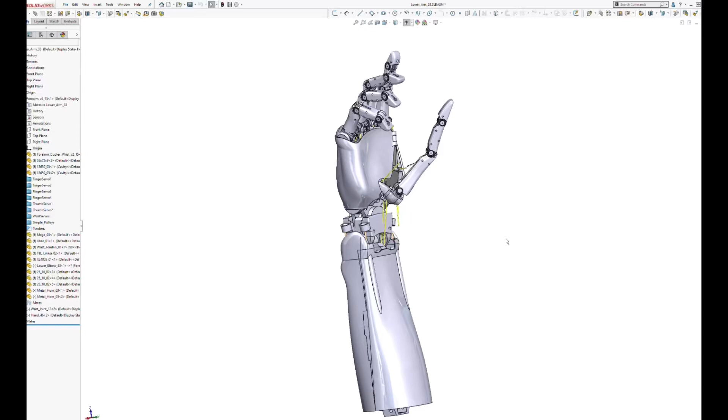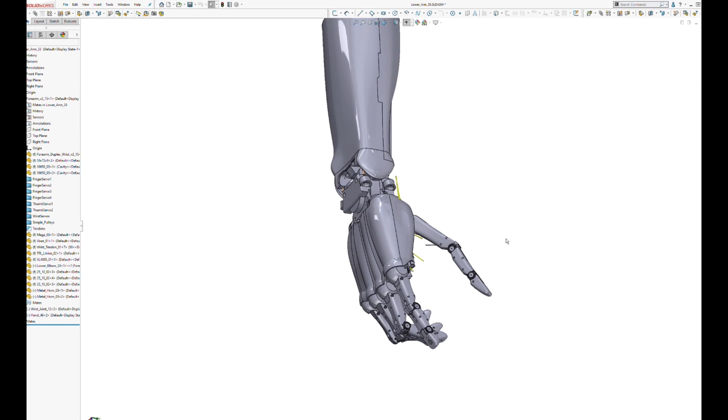Very nearly finished this first design phase for the V2, version 2 of the Dex hand, for dexterous hand. It's got an improved layout. There's 10 servos now in the palm section. Have a quick look at it if we make this transparent.

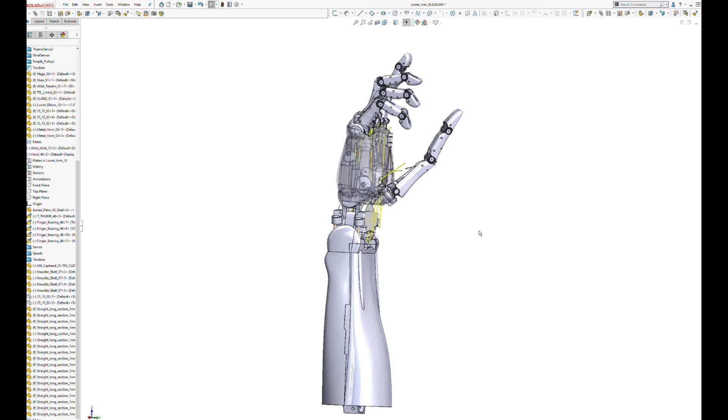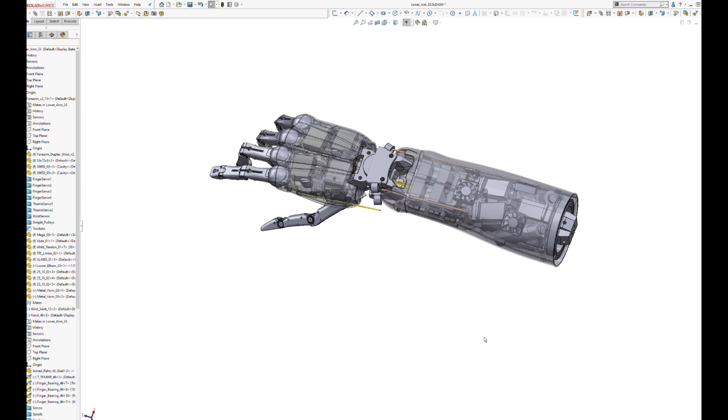And I've upgraded the wrist motors in the forearm area to standard size servos. So it's a lot more, I guess, powerful, but certainly stronger is what matters. It's also got twin fans in the forearm, because we did burn some out in the V1. And it's a little ugly, but you can also put 2 fans on the back of the hand, and time will tell if that's necessary for all functions.

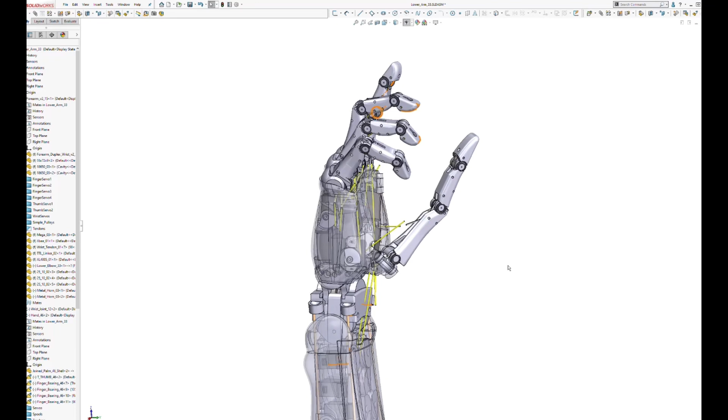Inside of the fingers is a lot smoother to help with simulation. Thumb might need a bit more work still. Not clear how to do that in computers. So that I'm going to do in physical prototyping, as in I'm going to build it and I'm going to see how the thumb performs.

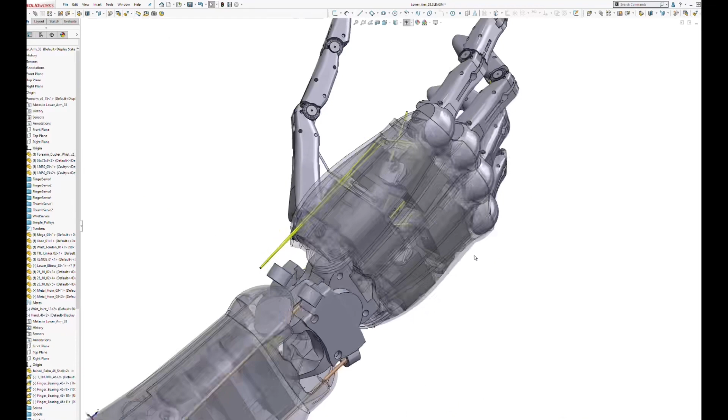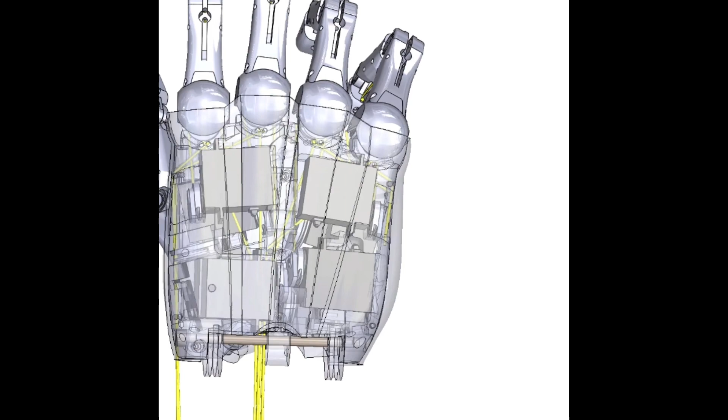So let's just take a closer look at the hand. It's got a concave palm, should help with gripping. Quite a prominent heel on the little finger side, but again to help with gripping. If we take a look inside, the extensor cables have been brought to the outside to make access far easier.

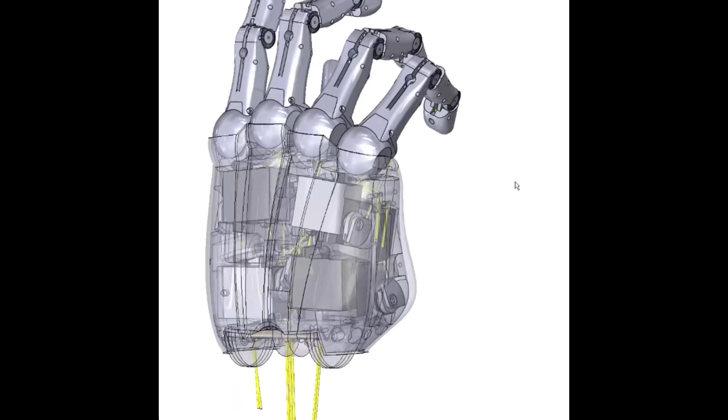At the moment these are still generally done with elastic bands, and they need to be changed far more frequently than any other part of the system. If I can source decent metal springs at a reasonable price that are exactly the right size, I will move over to those. Strangely hard to find. Generally have to buy a kit of hundreds of springs to get the 2 that you want, and I need at least 4 per hand.

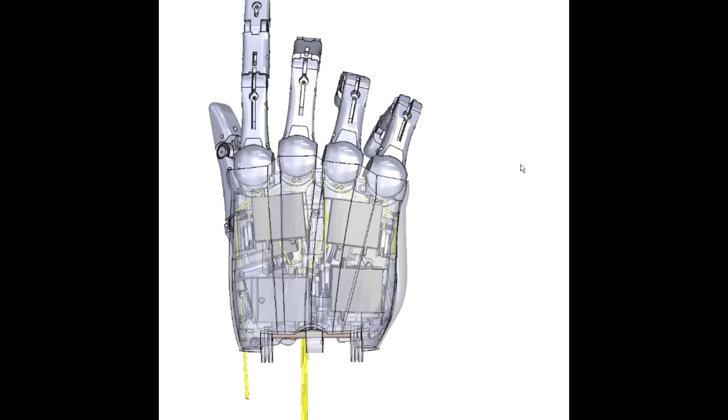Interesting to see if there's enough material to make the wrist joint as strong as it needs to be. And there are still these knuckle shells, which are going to need a mechanism to keep them in the right place, and I think I know what I'm going to do, again using springs, just connected at the back there, but that's a little experimental too.

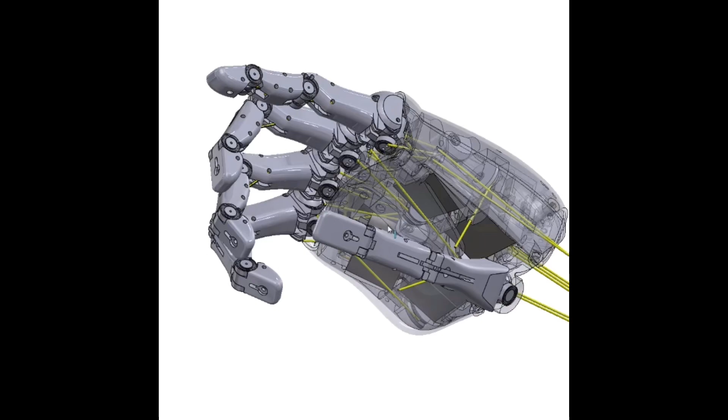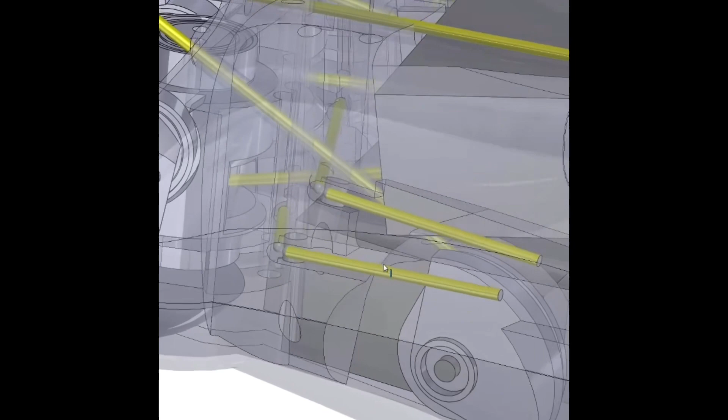Nonetheless, the bulk of the tendons should work almost exactly as the V1. The outer 2 had to go downwards at a considerably steeper angle, but that's just the way it is. And you can see how tightly everything's packed together. Tolerances: try to leave 0.4 for anything which has to move past another component, and 0.1 for the fit.

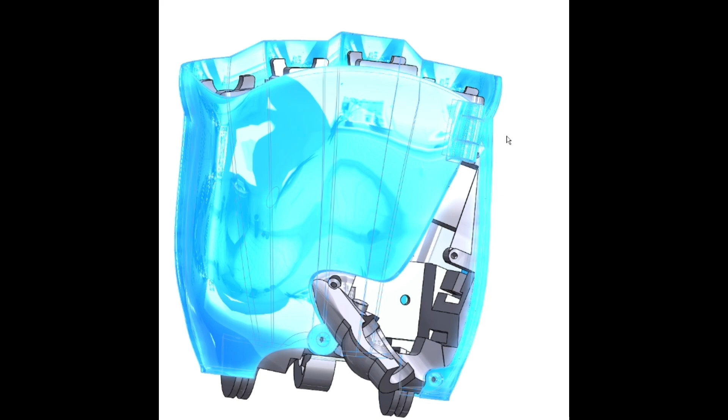So if we open up the palm, which is made of 4 solid bodies, we can hide the outer shell, which allows you to see all of the internal detail. This then gets split apart into its 4 separate pieces, and they can get loaded up onto the printer.

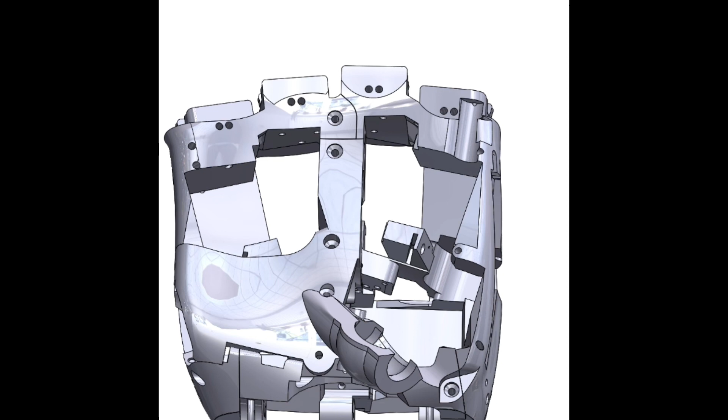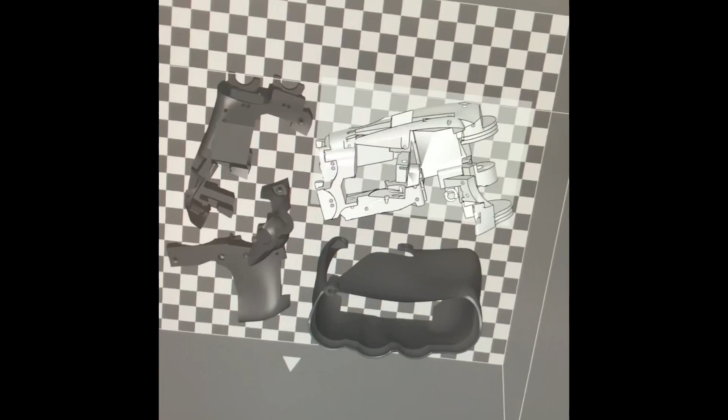These are the parts to print the palm, loaded into a slicer: outer cover, thumb support, little finger, and the thumb side. This is the Up Box slicer, which I'm doing more or less at maximum density, full strength print. Just hit preview and it will slice them up. These have been loaded as 4 separate models, so it'll do 4 sets of slicing.

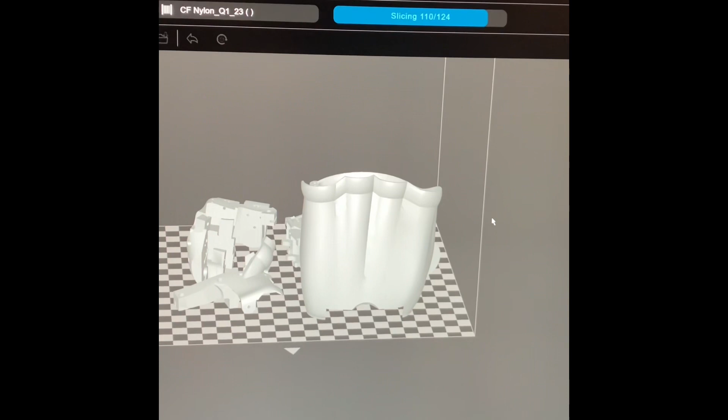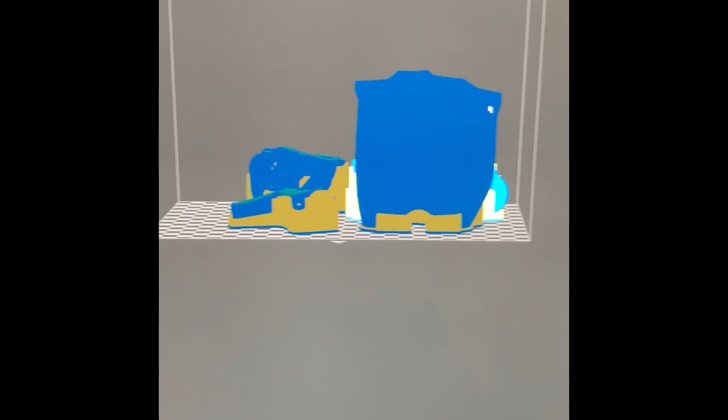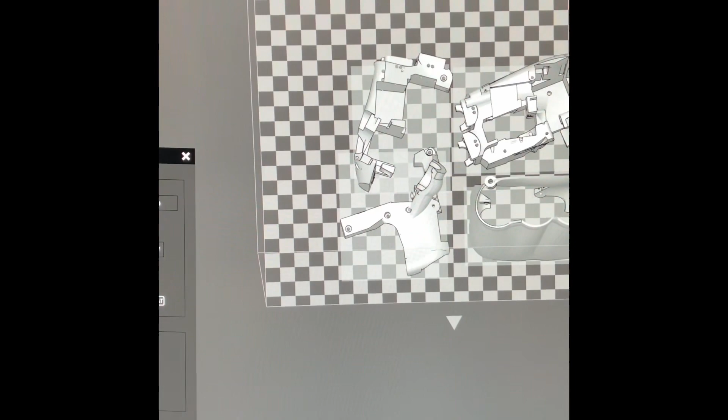It also means you can't pack them quite as closely together because the rafts will interfere. Although I think I'm pretty near to the stage where I can print without rafts, which will save a bit of plastic and a little bit of time. So that's going to take 8 hours and use 213 grams, and that is printing with a 0.4 layer thickness and a 0.6mm nozzle, which is about as fast as you can print on this machine.

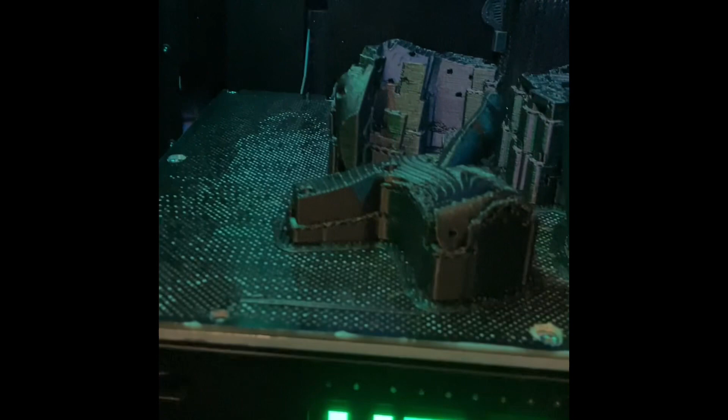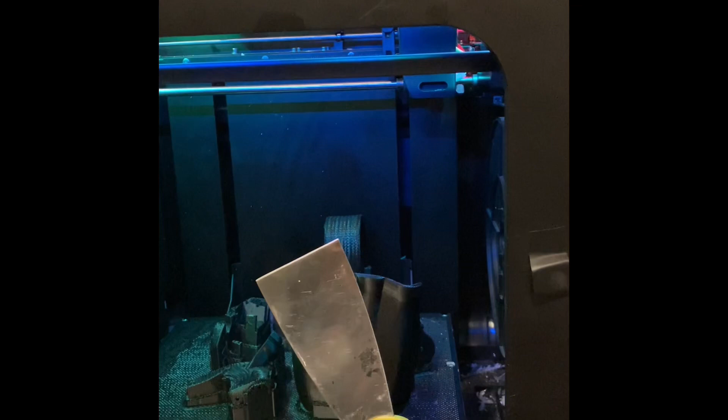Very important, must dry your filament before it goes in, especially with the nylon. Even overnight, it will show a clear difference of printing quality. That lot's come out pretty good. To get them off, you're going to need a spatula or a paint stripper. They should be well bonded, which they are. Platform preheats.

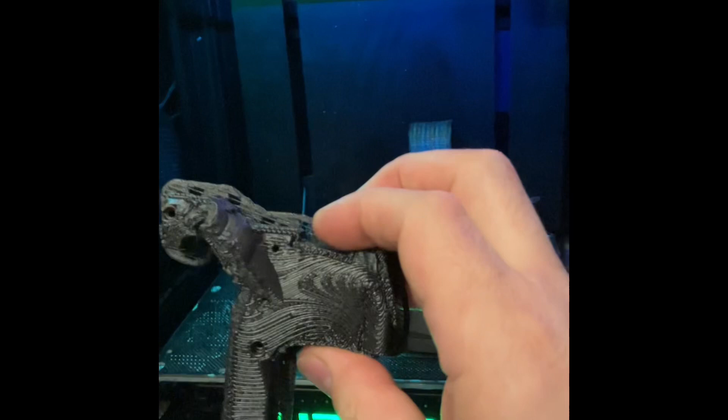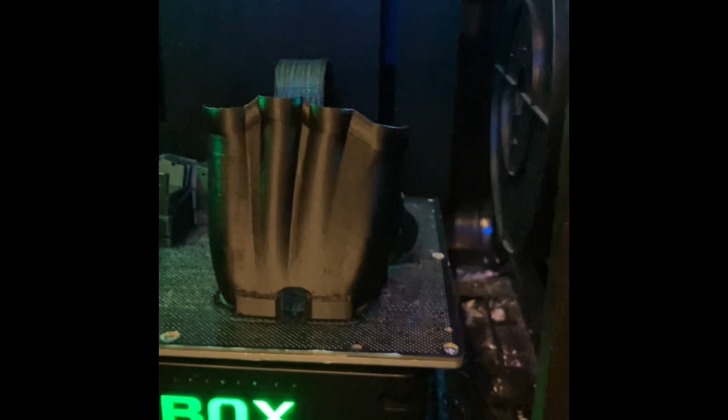65 degrees. Stability is good. Finish is good, not perfect. Good enough. Doesn't really matter on this one. So it could always be done with a finer setting if you really want to get perfect finish on that. This is, I doubt, the final version. Normally use 2 hands for this. See in a moment.

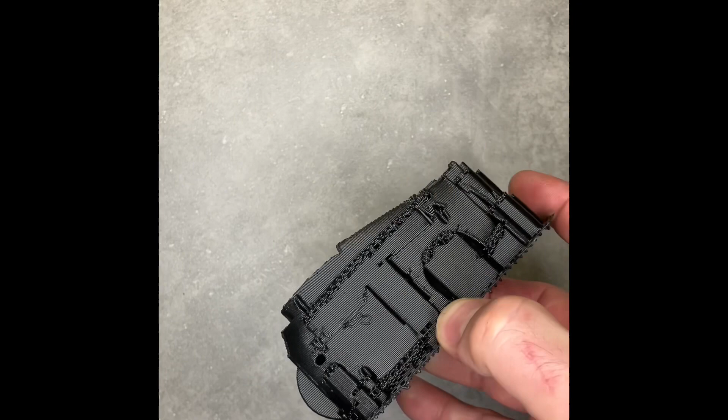The first rule of peeling complex prints, of removing the supports, is always wear a glove. The second rule of peeling complex prints is always wear a glove.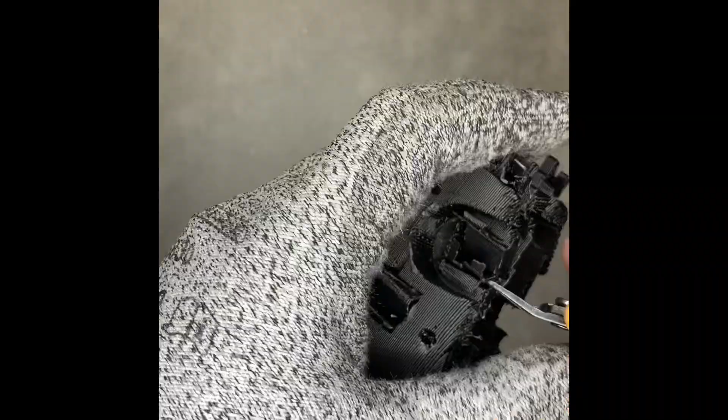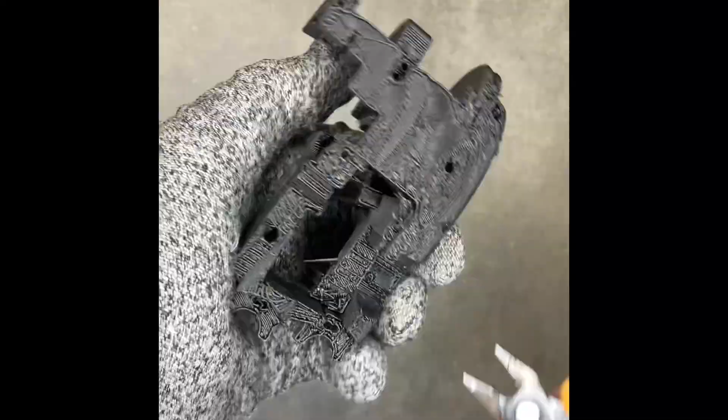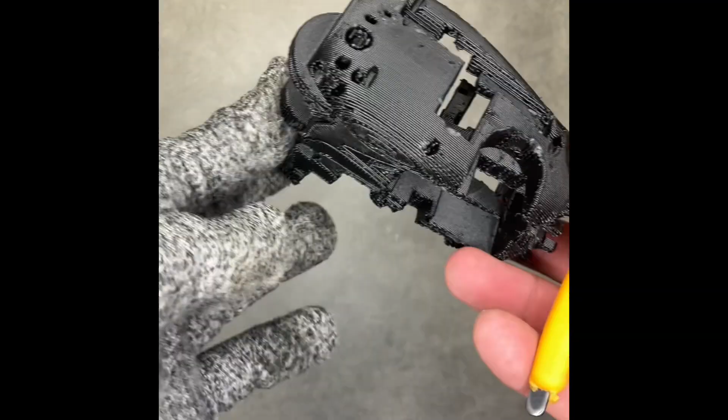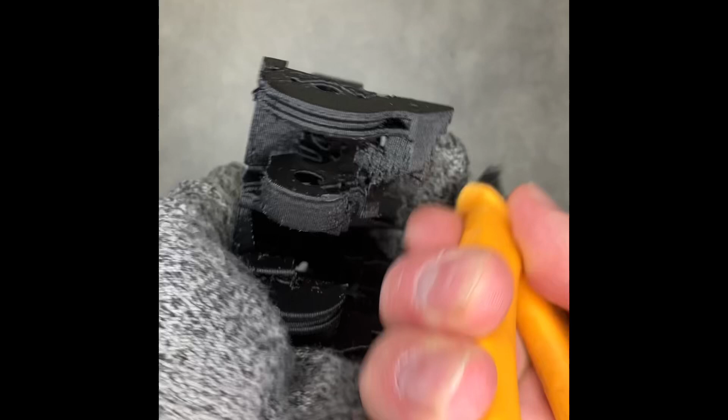Almost done. That's the most complex of them. And if your printer is not set up correctly, that will take much, much longer. So it is well worth taking the time in the beginning to make sure your volumes are set up correctly, your extruded volumes, so your sizing comes out well, and that all of the offsets to allow support removal are well calibrated.

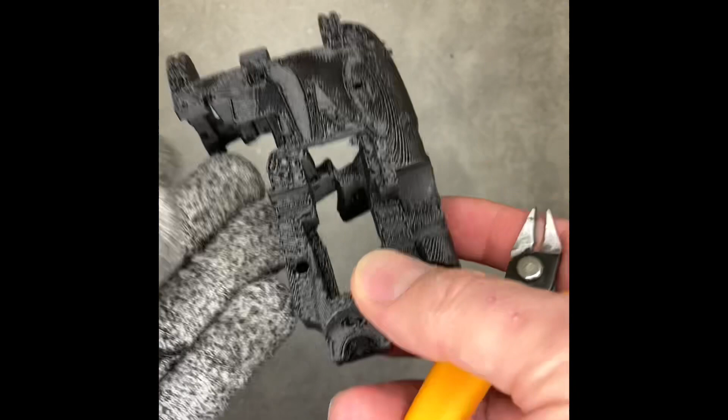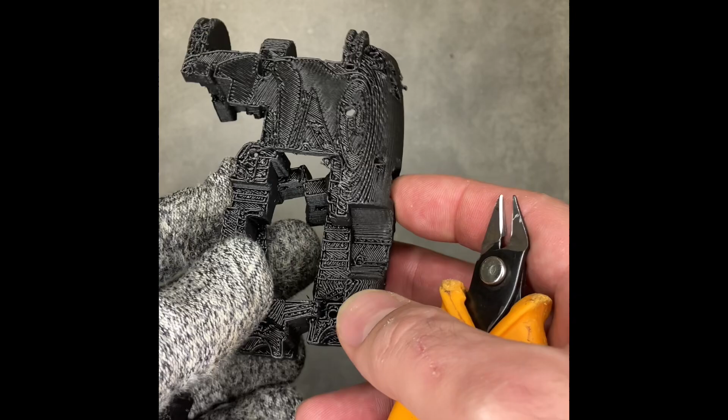Or you can move over to soluble supports or use a completely different printing technology if you have access to it. And eventually, when I know this design is fully correct, or at least correct enough, I shall upload the STL files to i.materialise, so you'll just be able to buy them perfectly formed and ready to go. 13 minutes. 1 down, 3 to go.

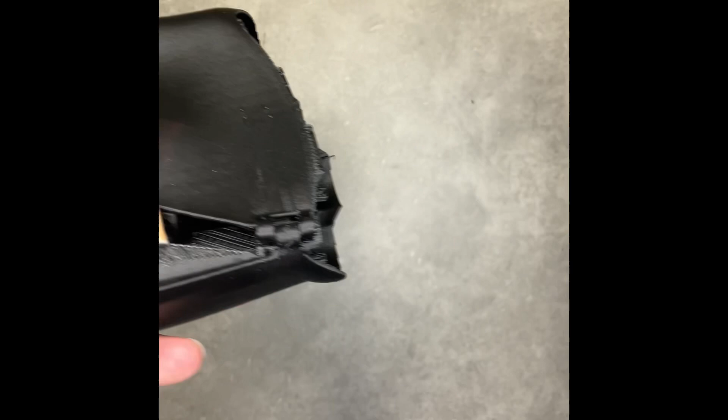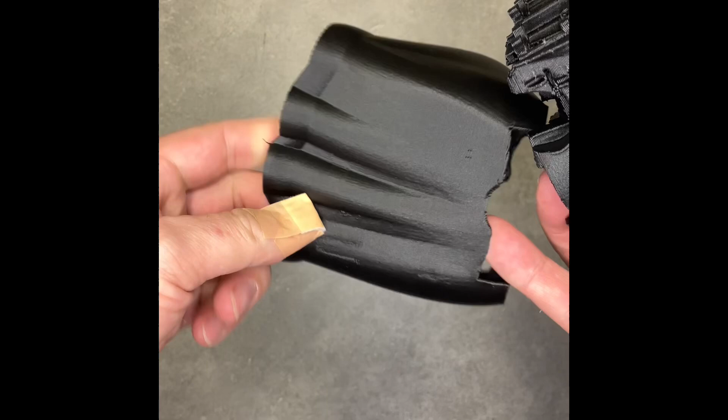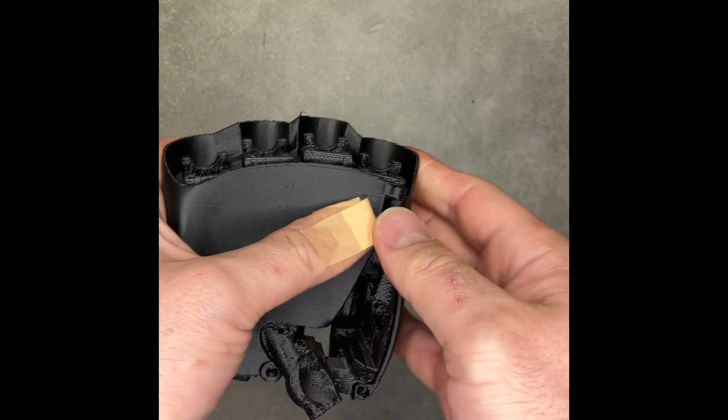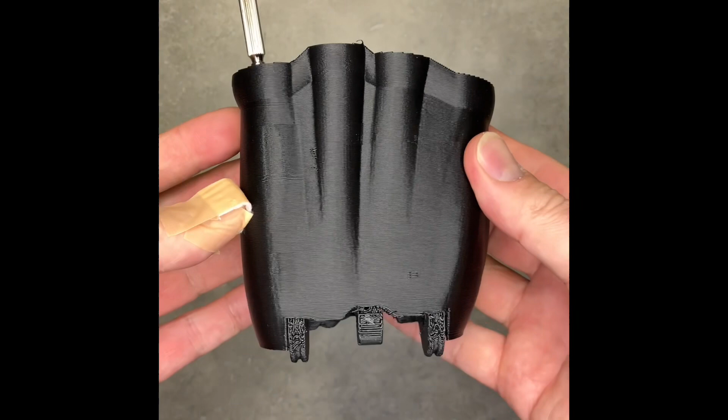This is thumb support. It's a little finger. That's the bulk. And when properly assembled with all the motors, that's pinned and screwed in many places. However, the skin, the shell, can still serve as a structural element. It's nice and tight fitting. This is actually slightly under tension, which makes the whole thing really very rigid.

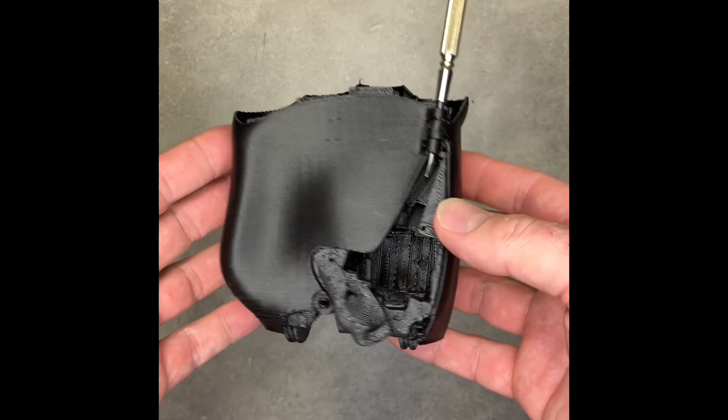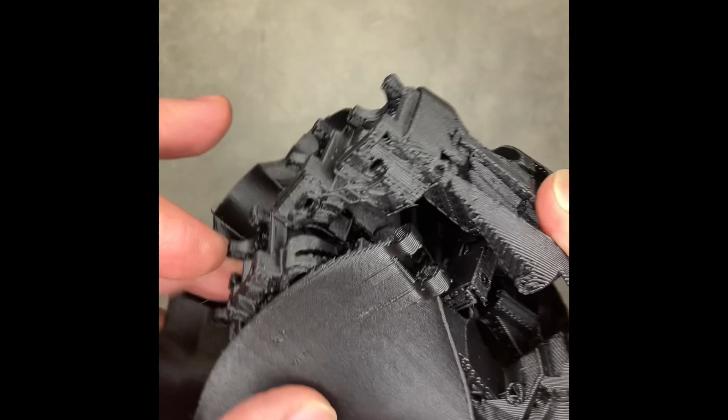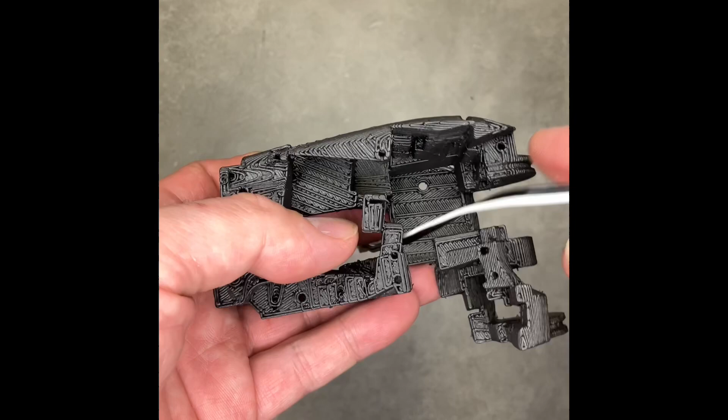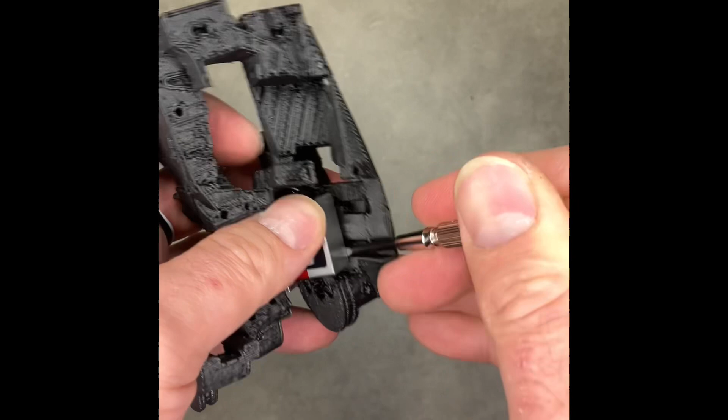That averages about 1.5 millimeter. And then carbon fibre nylon. That's very strong. The last test that can be done for full assembly is just to make sure all the motors fit and can be fitted into printed parts. The tricky one in particular is this deep motor all the way down here. So, correct sequence is to put your wire there, your motor there, and it'll just suddenly pop around.

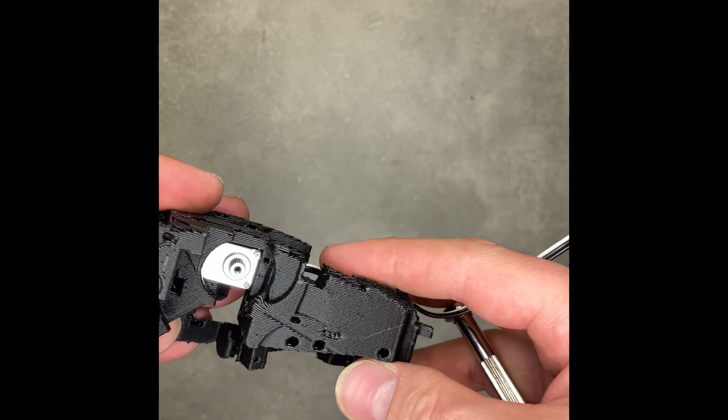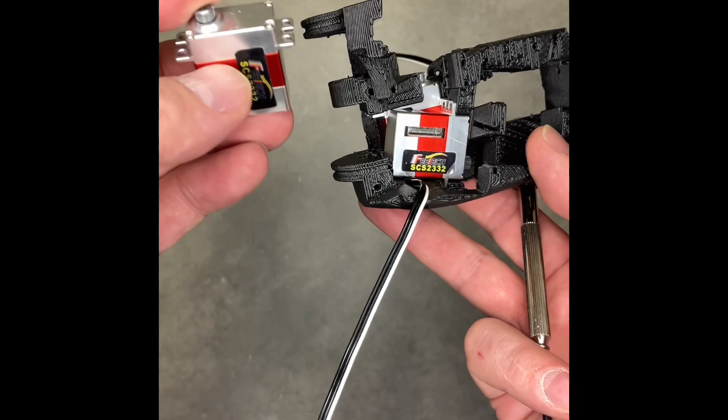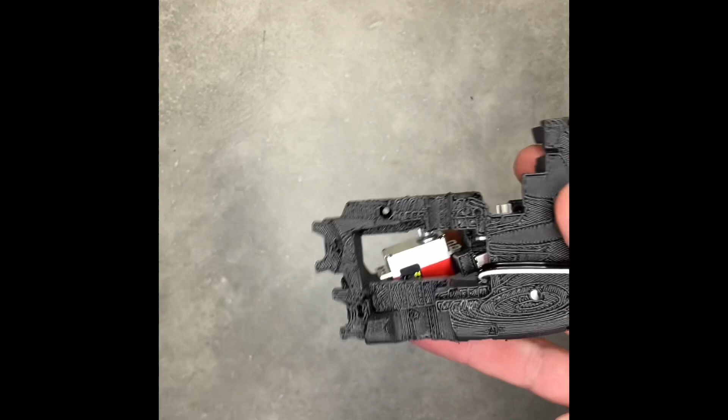Next on top, also quite an interesting fit. So put the wire like this, so that it engages into the groove. Has to go down flat, of course. I need two. Slides down to the bottom. Final one, you can check the position. It'll be held in place by the thumb insert. And it just goes like that. Then at the front, goes there, and then on the back. That one goes like that.

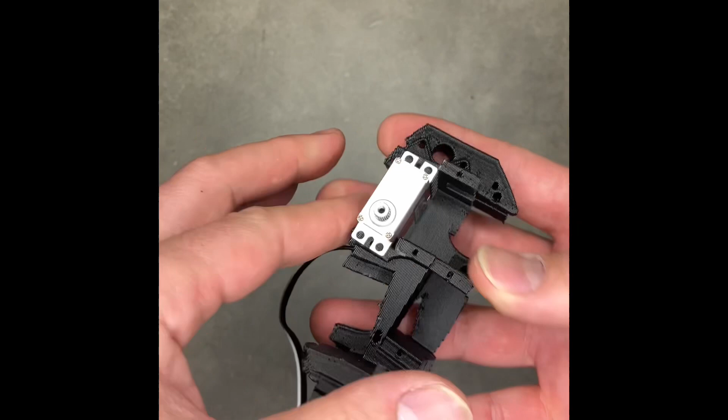Okay, so that's the thumb side. Tell by the groove where the wire goes. Goes up like that. So it comes down like that. That one slots in there. That one like that. Okay, very nice. No sanding, just peeled prints. That is nice.

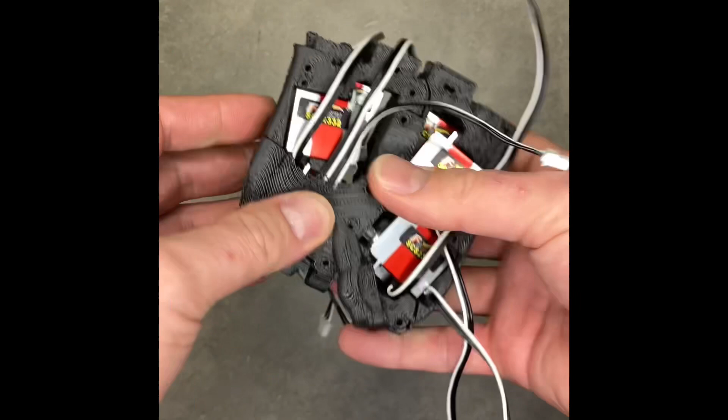We'll go like this. Pull these wires forward. That one goes like that. That one goes like that. And then the thumb. Drops over the whole lot. And with all these spare wires, it's no longer possible, I suspect, to fit it inside that. But so long as the motors are not making these parts push apart, which I'm fairly sure they're not, it should fit inside. Again, we shall find out as we get nearer the end.

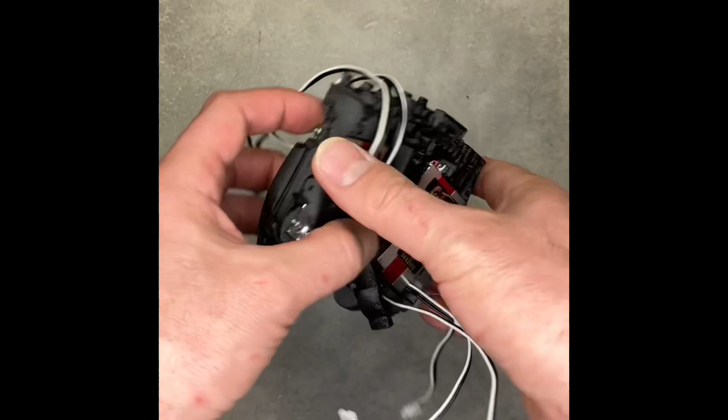But that for now is as far as the V2 palm assembly has got. Next I'm going to go back, finish the fingers, assemble those, and then connect up all the tendons, and then print forearm pieces, put all the motors in there, and then connect all the electronics, and then put some code in it, and then it should move.